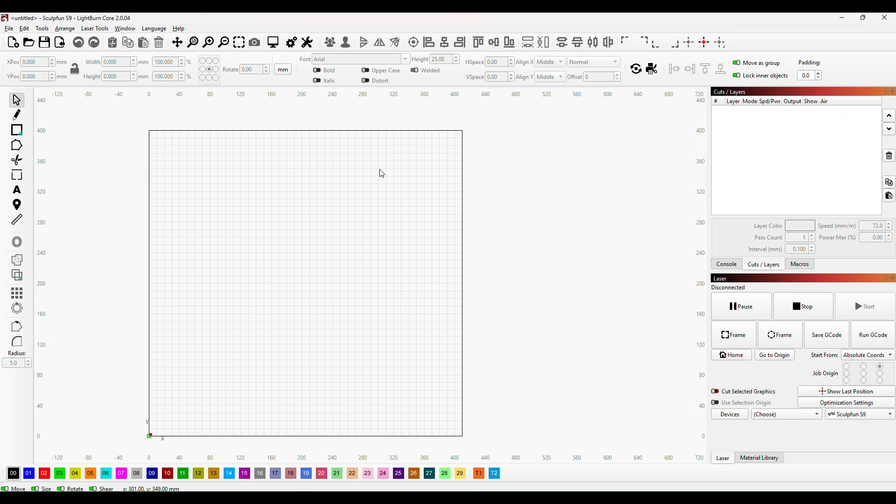So we open Lightburn, and the next thing we need to do is bring our plan into Lightburn. Now what I'm going to do is bring the whole plan in, put it over to one side here, and then work from that and bring shapes that we create into our workspace here, which will be the workspace for the Sculpfun S9, our laser cutter.

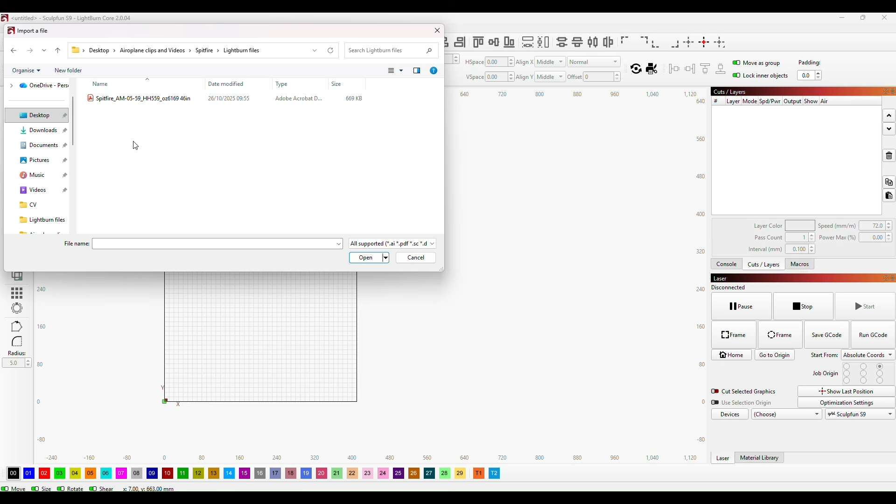So go to File, then import, and then we'll browse our computer till we find the file where we've got our plan, and click on the plan and import it in. So here we are with all of our files for all of our aircraft. So if we click on Spitfire, go into plan and Lightburn files, which is where we've stored it. It's a folder we made ourselves, and all I'm going to do is click on that.

Now it says the file we're trying to load is a multi-page document. Which page do we want to load? So we'll go with page 1, and there we have our Spitfire plan. Now you can see it's considerably bigger than our workspace. So what I'll do is move that up to here, because we can bring in page 2 as well, just in case we need to refer across at any time.

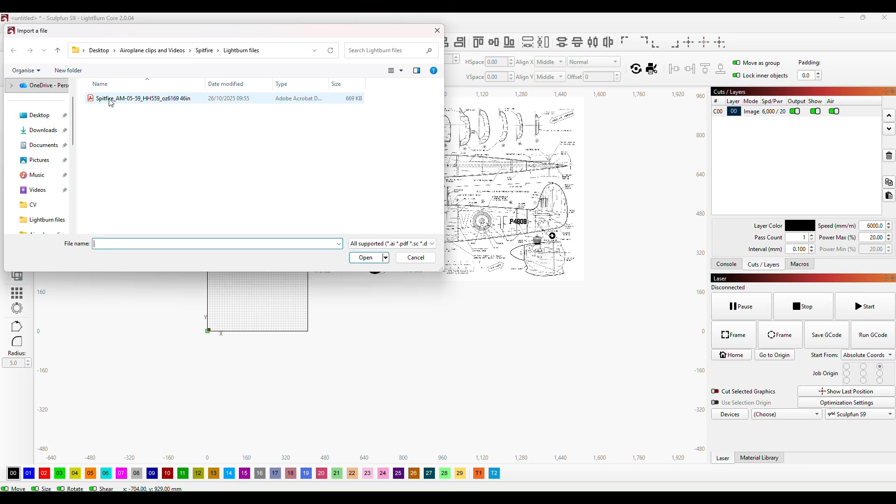While we're doing the fuselage, we might want to look at how the wing's going to shape and fit underneath, and when we're doing the wings we will perhaps want to look back at how the fuselage will look. So back again, we'll import again, so File, Import, and this time we will have page 2. And there it is. So we put page 2 just below page 1.

And we're going to work in any space that we want around here, but once we've got our components made up, then we'll move them into our workspace. Now this workspace is 410 by 400 millimeters, so you can see the scale of our plan here. So if we've got any large pieces that need cutting out, like the length of the fuselage, clearly we won't be able to cut them out in one piece.

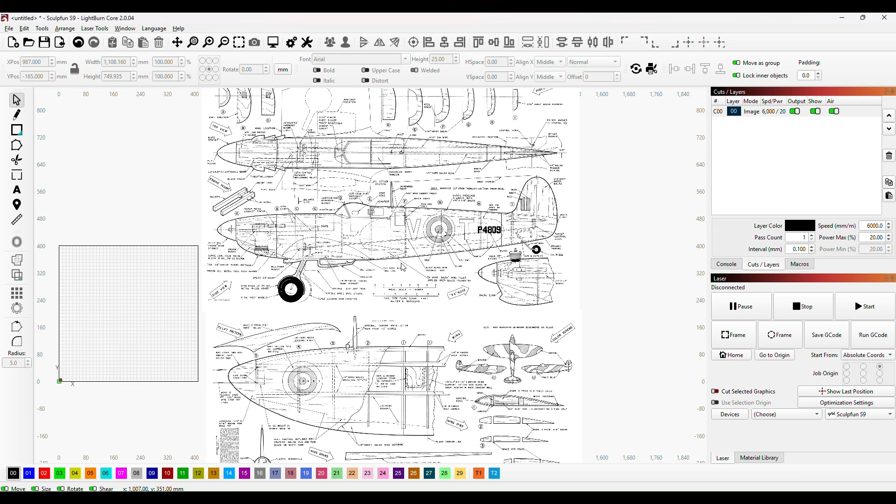We'll have to make adjustments and work that out when we come to it, but we'll go through all of that step by step. Okay, one of the first things that we need to look at on this plan is the fuselage itself. This fuselage is built around a keel, and if we scroll right in, you can see this dotted line just inside that goes all the way around. That is the keel, and if you look up here, you can see it's in dotted lines along the plan view.

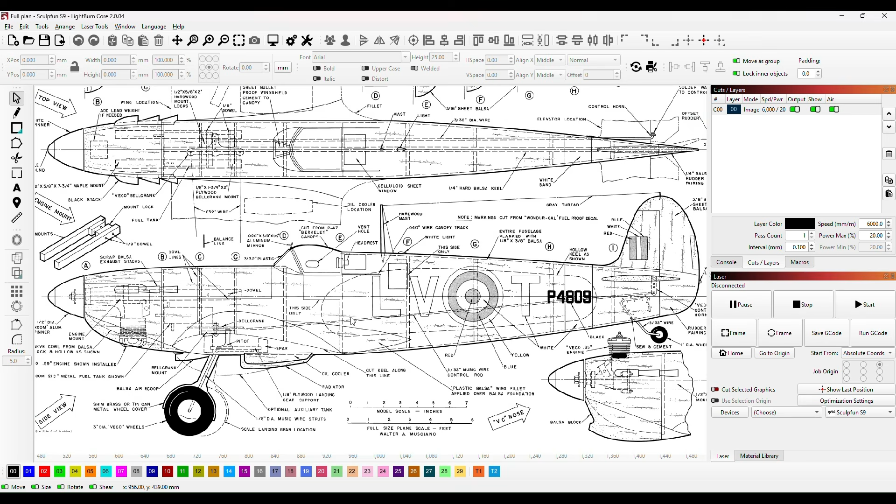What the keel is, it's a big center sheet that has the full profile of the aircraft or the fuselage, and then either side of that keel you've got these formers which go down the length. You can see they're all marked going down the length of the fuselage to give it its three-dimensional shape. So what we want to look at first is producing a flat keel or a flat outline shape of this fuselage. Now if you look just here, it says hollow keel as shown. In other words, it's not just a flat sheet of balsa, it's actually hollowed out there.

Now what we'll be doing is taking this a little further. I'll be making an outline of the keel so that we can then put these formers on the outside. So what I'll be doing is making a series of pieces that will fit on our workspace, that will join together and form this center part of the aircraft. Okay, so that's the first thing we'll get on with.

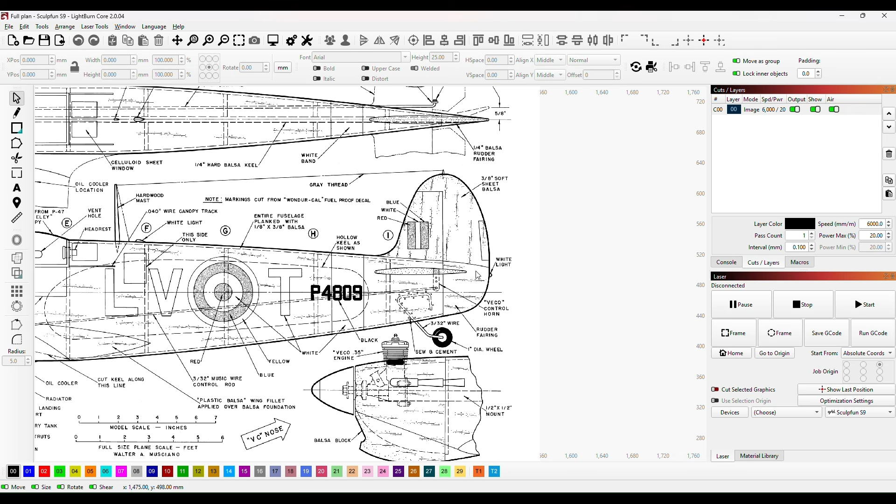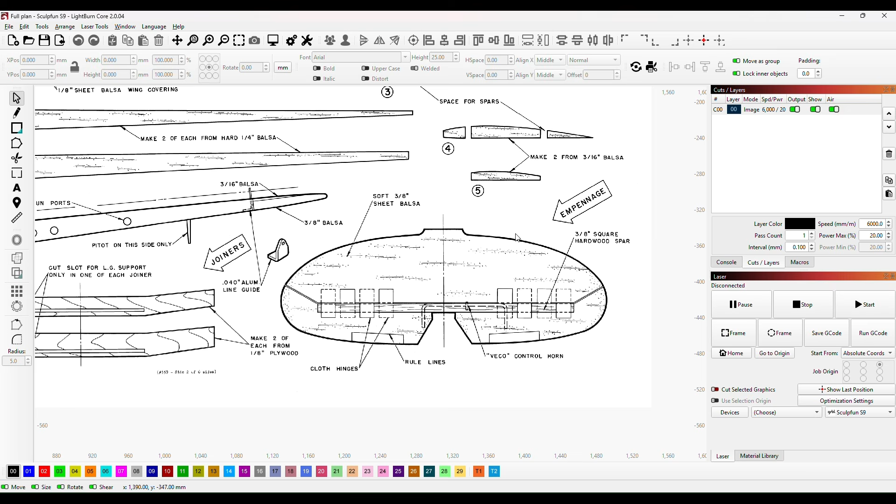Now if you just have a look here, you can see the tail plane or the horizontal stabilizer is just a solid piece of balsa, and it slots into this keel. So if we just come down to our second sheet here, this is the tail plane. What we'll do with this is cut this part out of a single piece, and I'll leave the center section flat, and we'll sand down the outside of that center section so that we get the profile of the tail plane.

So by doing that, when we come to produce this keel here, all we need to do is produce a flat slot in there rather than this profiled slot, and that will allow us to just push the tail plane in, and it'll fit really nicely. Okay, so let's get on with doing that then.

So to make this keel, all I'm going to do is trace this outline all the way round, drop in here, and then all the way around the outside down to this point, and then back under, and then up here, because the keel, as you can see, finishes just there. So then the rest from that point forward will be where our motor sits.

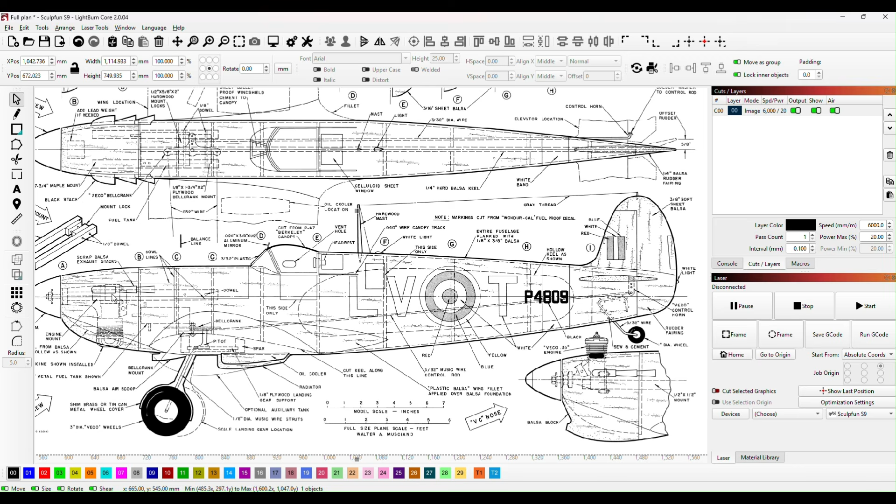Now having said that, I think we would be better off extending the keel forward to the point where our electric motor will sit, because obviously this is designed to fit an old internal combustion engine, one of the glow motors, or perhaps a diesel, and so our motor will be much shorter. So I'm going to bring the keel further down so that our motor will sit here and the propeller will still be in the right place, the spinner will still be in the right place. Okay, so with that said, let's trace this outline and I'll show you how I'm going to do that.

Now our motor is 30mm long, so what I'm going to do is just measure 30mm from there, and I'm going to just mark that off. Now I'll show you how I'll do that. All I'm going to do is create a rectangle, and we'll do that in a different colour. I think we'll do that in blue so that it stands out. And then if I make the width of that 30mm, just like that,

I can now bring that down, and if I just line that up with the end of the aircraft there, I know that now this bulkhead here, I need another one just here. So I'm going to make my keel that size, and then I'm going to produce an additional bulkhead here to mount the motor on.

Okay, so if I use the line tool, and I'm going to use a different colour again so that it stands out against what we're doing, all I need to do then is start to follow around the outside of the shape of the aircraft. Now you'll notice I'm not following the dotted line, which is the normal keel. I'm following the outer line, and there's a reason for this.

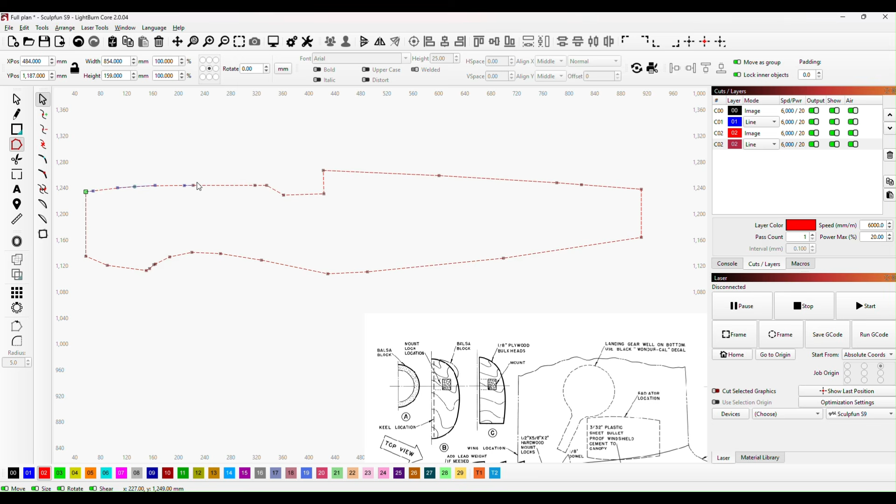So what I'm going to do with that is just bring that shape over to one side. I'm just going to bring that to there, and that's going to be our outline. So if I just zoom in on that, I'm going to convert that to nodes, and then each of these nodes in the center, I'm going to hover over those and convert that to a smooth curve node just by pressing S, and what that will do is blend our shapes in.

That just needs to go up slightly, so got to make sure that these remain smooth, and there may be some adjustment to be done. So just select that node, press Control, and then the Shift arrow keys to just blend that slightly. There we go.

Okay, next we'll come to this one, hover over that and press S, and then this one, press S, and you can see the difference between a corner node and a smooth curve node. The corner nodes are square, you can see this one is square, and the smooth curve nodes are round. So that's the difference. Now these here I'm leaving as corner nodes because I want that to be absolutely flat and straight, as I want this to be flat and straight. So I'll come to this one and convert that to a smooth curve node. And the same with this one, and then the same with each of these.

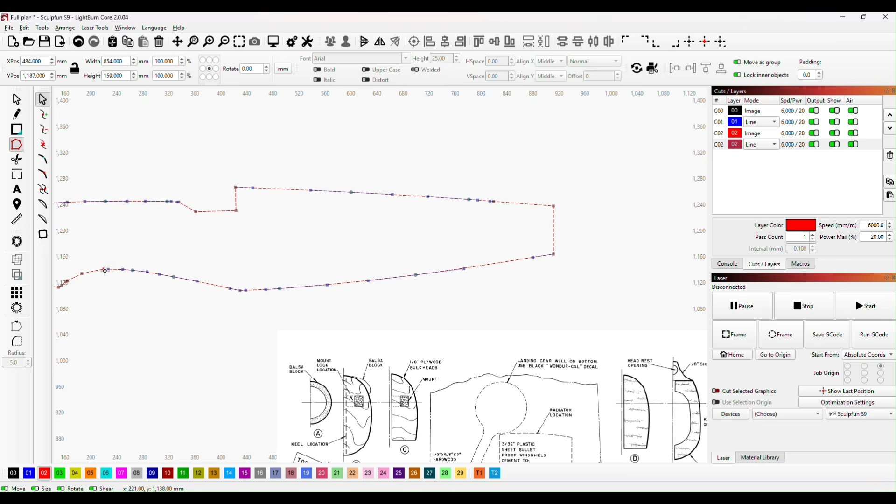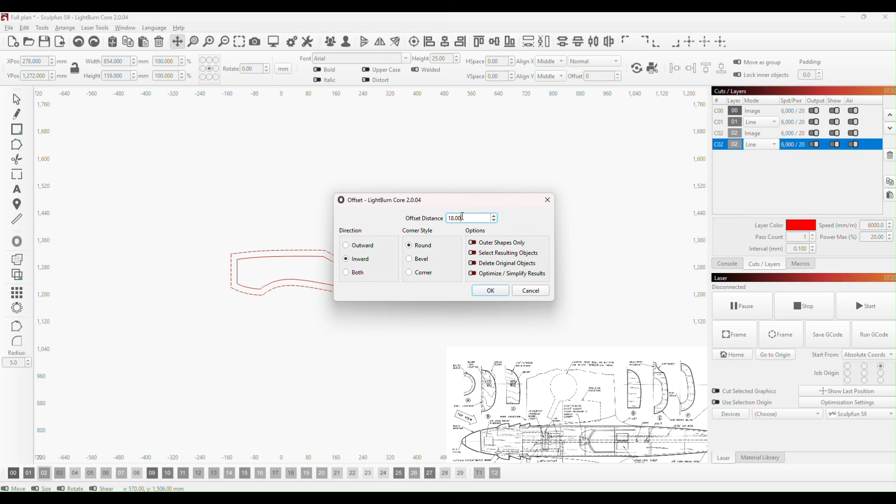And this one here, and there we go. So I think that when we come off that now, we'll find that we have got a nice profile of the Spitfire. Now if I use the offset shape tool, and I click on that and I come inwards, I would say probably maybe 18 millimeters. So 18 millimeters.

What that gives us is an 18 millimeter shape all the way round, and this is going to be cut out of 8 millimeter balsa, so it's going to be nice and thick and sturdy, and that will give us our outer shape for our aircraft. The reason I've hollowed this out is because we're going to have our electronics inside the aircraft. Okay, so all we need to do with this is cut it into shapes that will fit into our workspace, and we'll be able to then lay that out and cut out the keel.

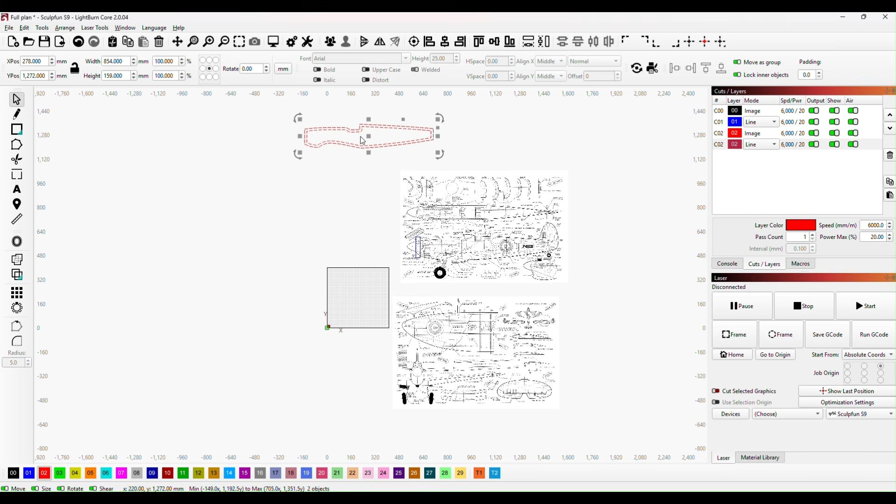So to cut the outline that we've created into small sections, we will use our line tool, and, making sure that we cross the line completely, we will just put our lines down like that, and then we make a copy of the whole thing, just like that, press Control C, Control V.

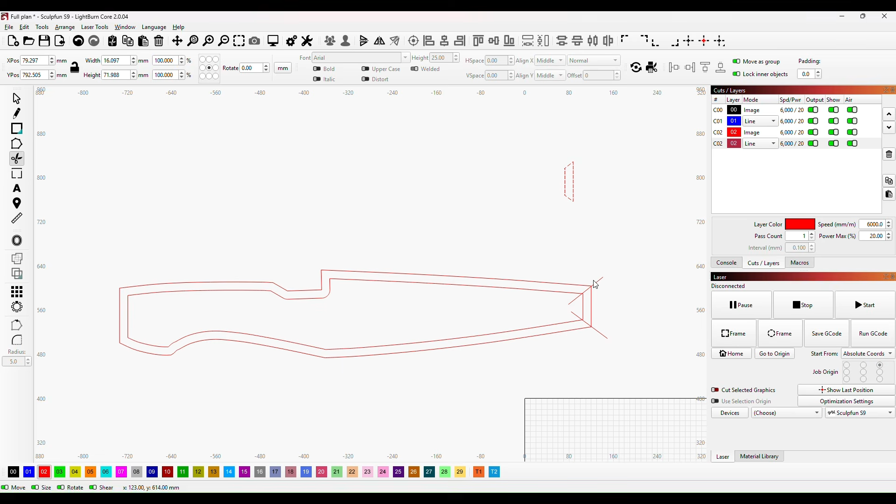What we've got now is a copy, and if we go to our snipping tool, all we need to do is snip away the bits that we don't want, and we're now left with our end piece, which will be just like that.

And what we can do is we can now label this up. Go to our label, and we'll reduce the size of this, I think, to 5 millimeters, and we'll just write that in as, in fact we'll go down to 4 millimeters, I think, and we'll just label this as keel K1, or K1, keel 1, and that will be our first component of the keel.

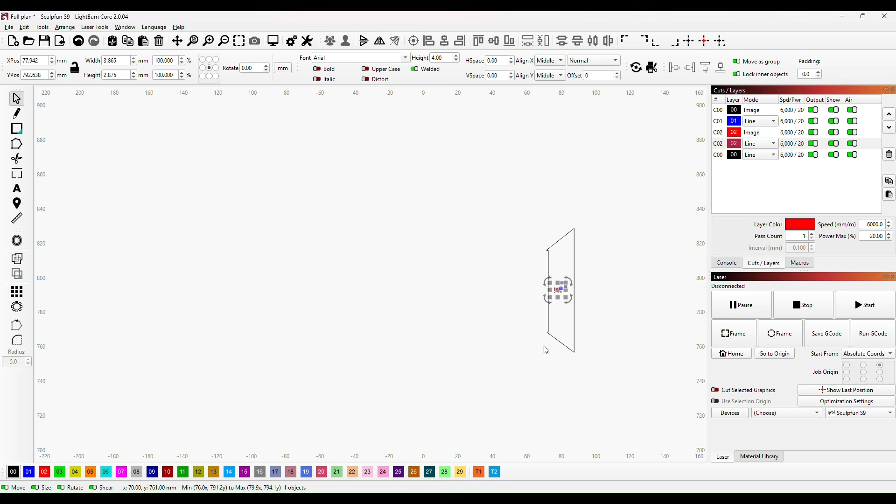So what I'll do very quickly is I'll change the outside of that to a cutting layer, and I'll change the text to our engraving layer, which is going to be the blue layer later, and I can bring that onto our workspace just down here, and then just lie that flat.

And what we'll do is we'll put that down here somewhere. Whoops. If you do find that you do something like that, what I've done here is I've dragged the shape without taking the letter in. If you press Ctrl Z, you'll go back to where you were. So what I need to do with this is just group that shape. So that's now a completed part of our keel.

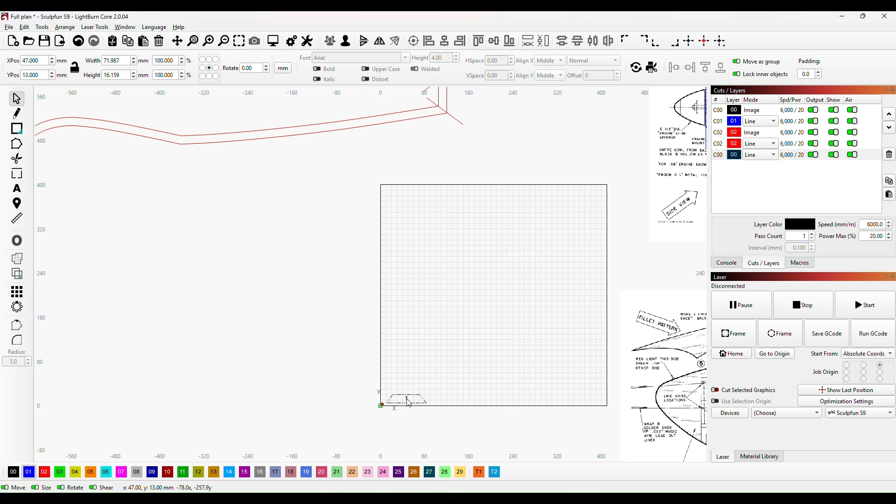If I want to get this flat and horizontal, say if it was at a slight angle, all I need to do is go to nodes, hover over one of the edges and press A, and that will align it. So that's now aligned to the horizontal, and I can now put that onto our workspace wherever I want to, and I'll arrange everything else the same.

Now the next thing I want to do, and I'll be doing this to all of the shapes that we make, is I want to put in some tabs so that when I cut it out on the laser it doesn't fall apart. And all I'll do, put a little tab there and a little tab there.

Now, in case you're wondering what those tabs do, they will leave a 0.5 millimeter gap in the laser cut, and if we go to preview you'll be able to see that. So if we scroll in, you can see there's a little gap now, and there's a little gap there, just there and there, and so that will mean that when we pick up our sheet of balsa later, when all of our components are cut out, everything doesn't fall out.

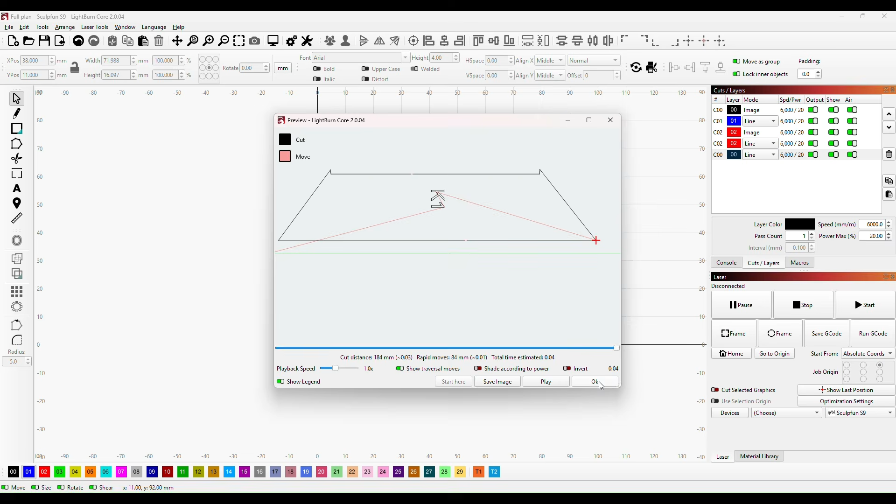Okay, so what I'm going to do now is exactly the same process with each of these all the way around the shape, but before I do that, let's just have a look at what we can actually fit onto our workspace. So we're going to have to cut the top section as well as the bottom sections, etc.

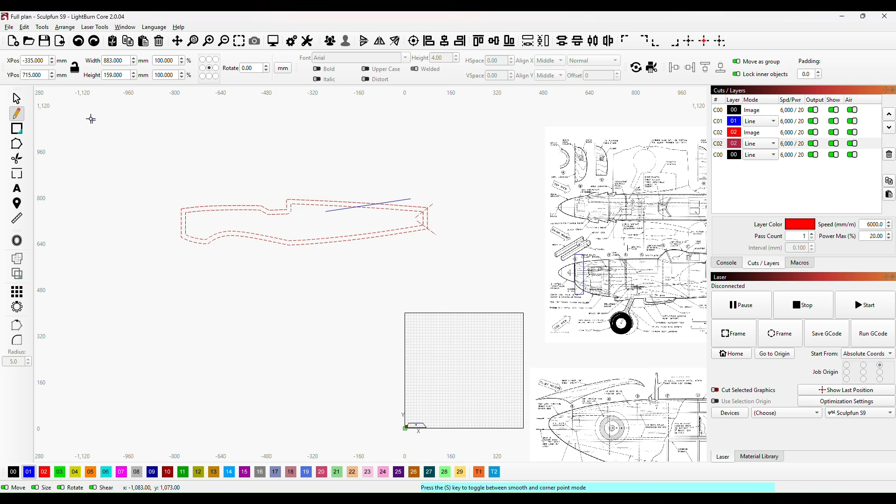So if we go to our line tool, now what I want to do this time is I want to make the line quite long, and at a very shallow angle, so that we get a nice long length of the component to stick together. So I think that should do that. Okay, move that along a little bit. And we'll call this one K2, and then K3, K4, and we'll just keep going around creating this shape.

So I'll just make another copy. And then all I'm going to do is use my snipping tool to remove everything I don't want from there. And I'm left with K2. So if I do the same process, if I just level this up, go to nodes, click on there, hover over this one, press A, and that's leveled us up. Come off nodes.

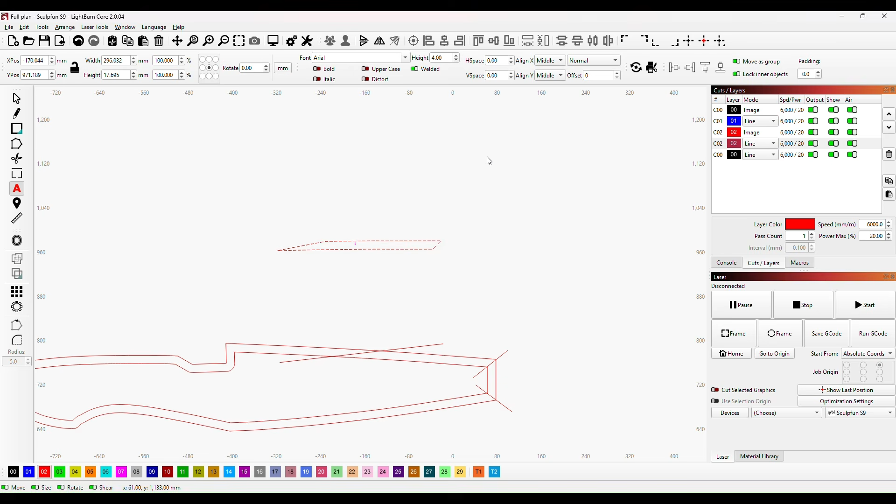And we will call that K2, keel 2. Make the outside our cutting layer, the text our engraving layer. We'll group, and we'll put our tabs in. And that's our component completed, and that's K2.

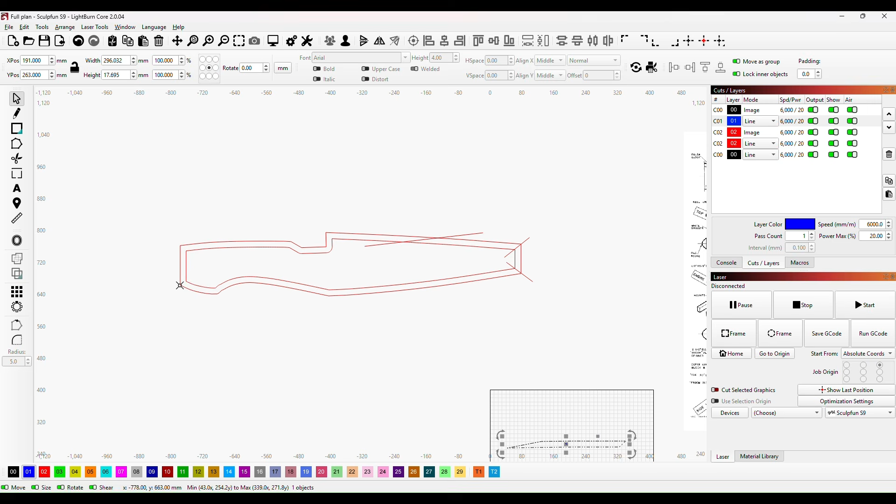What I'll do now is I will very quickly go around the shape, and every time there's a change in direction like this, that will be a separate component. So I'll make a component there which will join with a component here and there, and then I'll make this into the largest components I can, make the end, and I'll show you what that looks like in just a minute. Okay, so this is the completed shape here with all the cutting lines on, and these are all the components that I've made up, which when fastened together will create the keel.

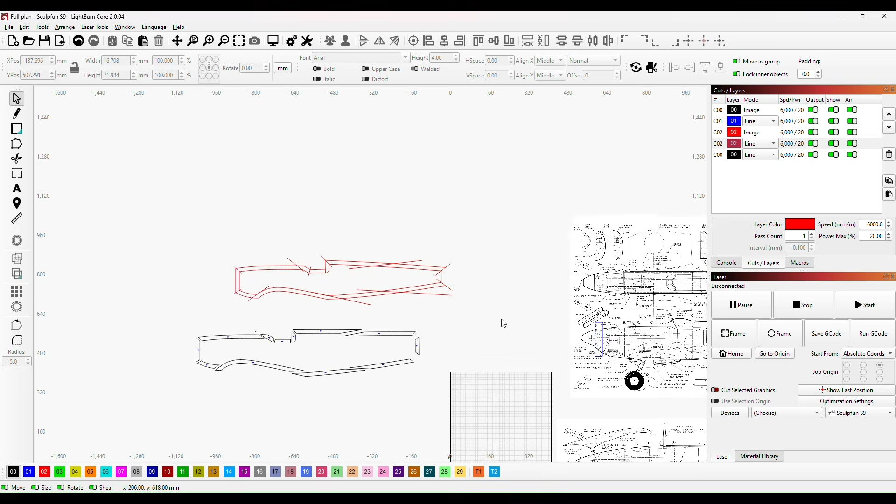I've brought the nose forward, as you remember, so our bulkhead we will make where we've got these sections here. We will have another bulkhead just here on this blue line, which we'll make up, and in that I will put the holes to mount the motor, and I'll show you what that looks like when we come to put it together.

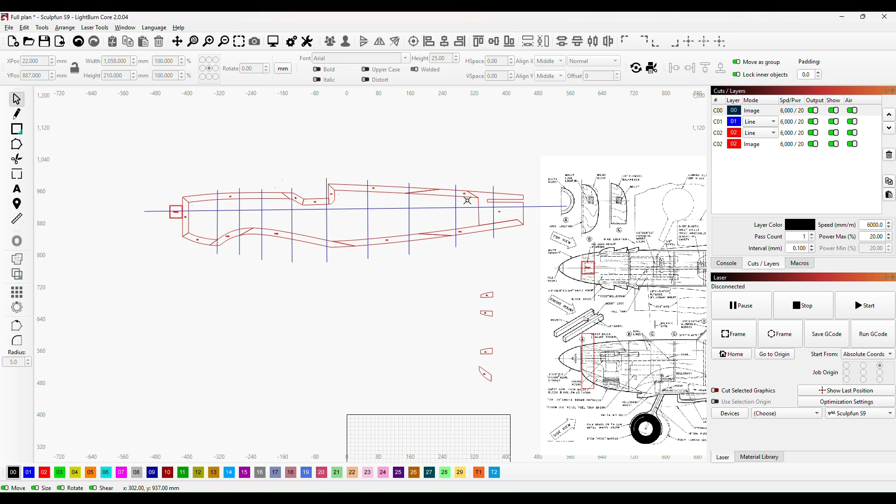Okay, so what I've got here now is I've got all of the components on this shape here, all represented, but I've made a change to the back. Remember we spoke about the rear or the tail plane that has to slot in at the back. So where we had the small shape here, I've gone into nodes and brought it down from the top, I've made it into a larger shape, and then I've cut in a slot here, 7mm wide slot, because that's the material that I'm going to use.

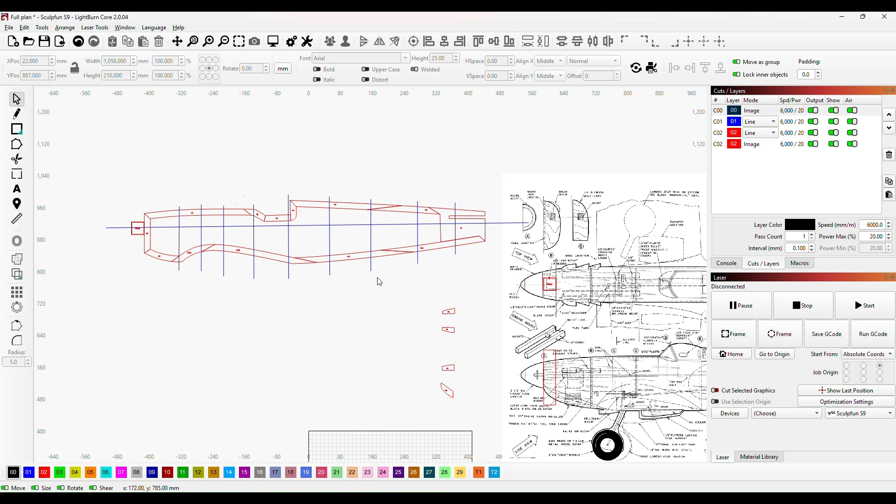And the way I did that was I just made a rectangle. When this was a solid piece, I made a rectangle that was 7mm high, and I overlapped that to where the wing would be, and then I used the snipping tool to cut that slot out. Now what I'm going to do is overlay this onto the aircraft itself, or onto the plan itself, and I'll then talk through what I've done here.

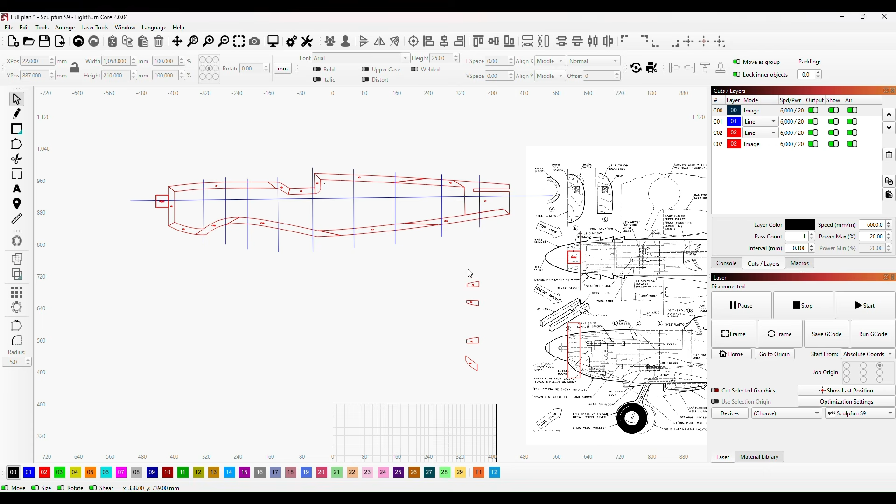Each of these blue lines is one of these formers up here. So each of these formers is represented on the plan, and I've put a blue line where those formers are, so that when I come to make the formers, I'll be able to line them up on this plan and put them in exactly the right place so that I can do any fine adjustments. But I'll show you how I'm going to go about that later. Let me just put this back onto the plan.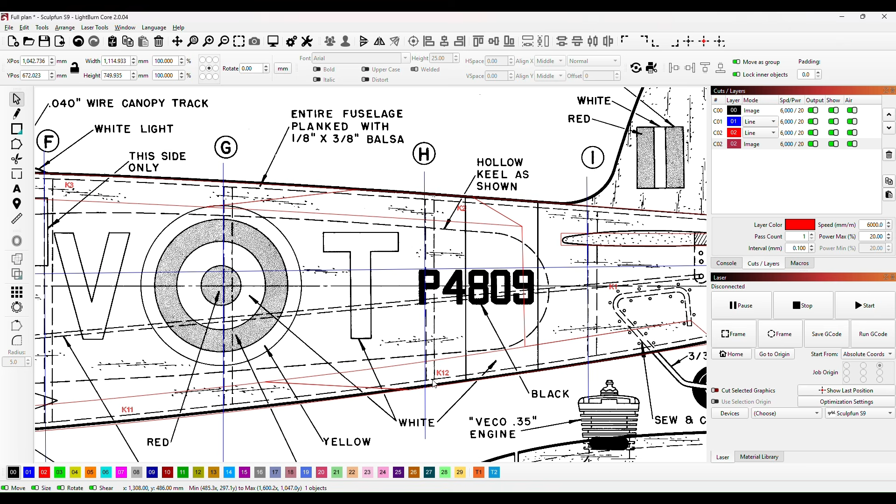Okay, so what you can see now is, if we just scroll in here, the slot in the tail end is exactly where the tail plane will be, and each of these blue lines, you can see one there, and that's just below where former H will be. There's another one here which is where former I will be, and I've put these blue lines on the front edge of each of these formers, so you can see the former would sit there, and the blue line is at the front edge of that.

Okay, so what this means now is that I can start to make these formers, and I've got a plan here which will be over to one side, which will help me with shaping them up, and I'll show you how I do that in just a minute.

Now these little shapes here, what I've got is nose side, so N and a small s, NS, and this is nose on the other side. So if we come up to here, they are going to be what sits either side of the motor and gives us the space for the very front of our fuselage, where the motor will protrude out and the spinner will sit. So I'll just move those over there.

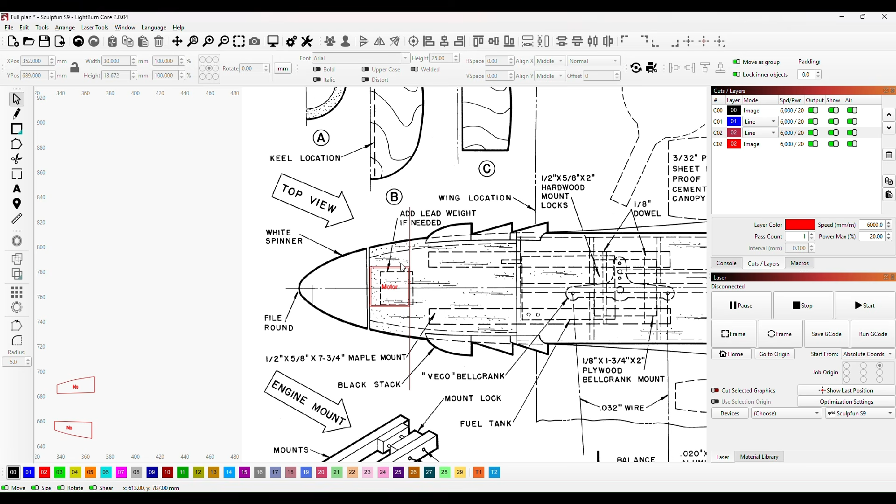I just wanted to show you those before I move them away, and I did those in exactly the same way as I did the outline. I just went to a line and then drew round, I put a node in the middle, made that into a smooth curve node, and that's how we did that. So with all that said, I'm going to now move this out, and use that as a plan when we start to make up these components. And we'll start with component B, just here.

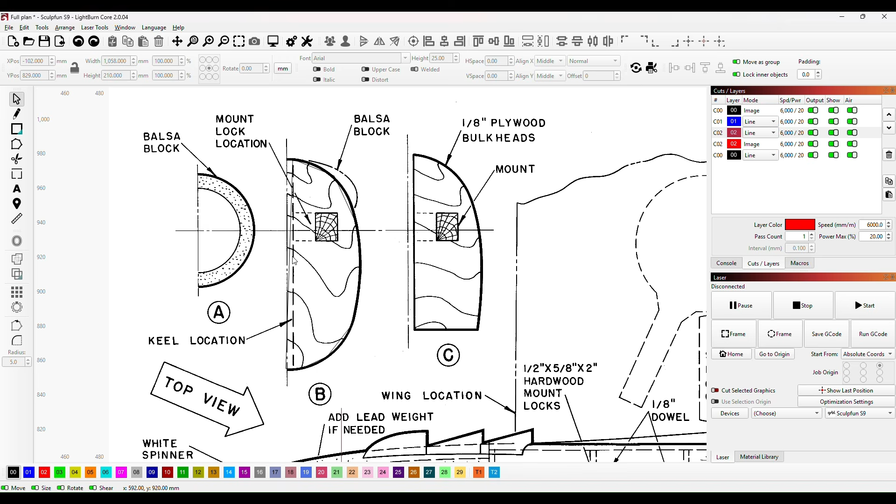And all we're going to do is produce this with our line tool. Now our keel will be in there, so we've got to allow for that. And the way I'm going to do this is I'm going to just come round like this, oops, I'll correct that in just 1 second. Now if I just convert this to a different colour, what we'll be able to do is go to nodes, and I'll be able to bring those nodes in.

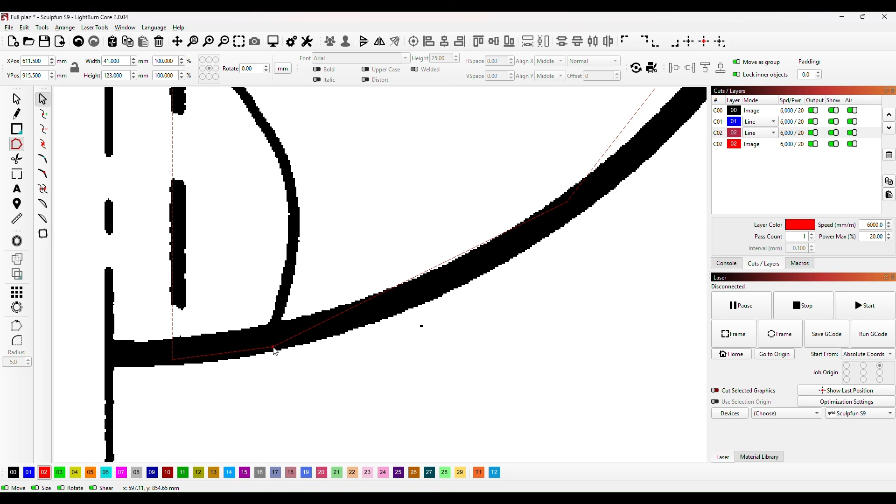Now I'm going to go to the outside of this line, but I need to bring that in to there because that is where the keel will be sitting, and I'll go to the inside of that keel, which would be the outside of this shape, so to speak. Select this node, we can bring that to the outside, and then select this node, bring that to the outside, and just follow that process round.

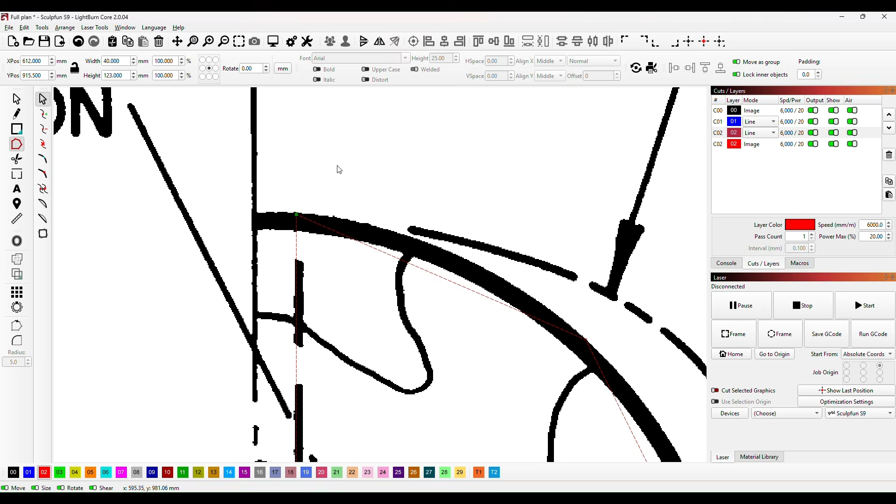Just follow the process round until all of the nodes are on the outside of the line, and this node here will just join those together, snap those together just like that. Okay, so what we've got now is we've now got former B made. Now there's a couple of things to note here.

One is these formers are designed to have planking all around the outside, which we're not going to do, so we may just have to alter the size of these formers once we've fully created them. So all I'm going to do now is change each of these into a smooth curve node by hovering over it, press S, and then when we come off there, you can see that that is now a perfect shape.

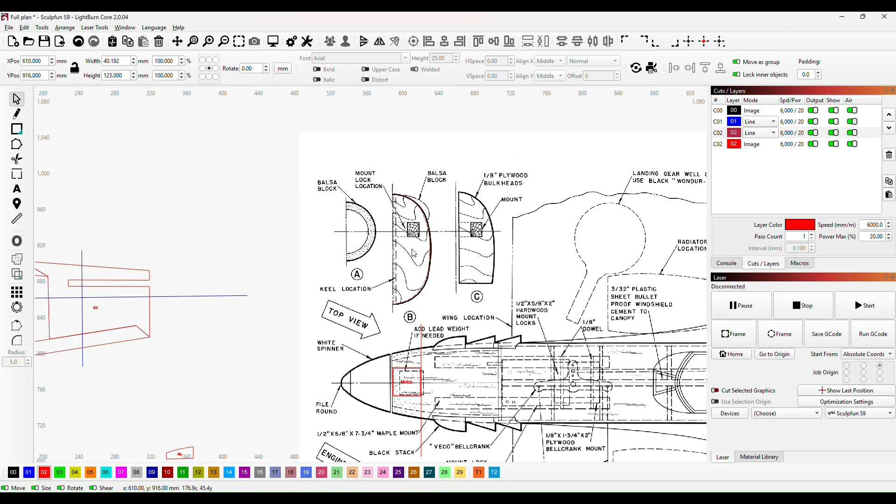If we just go back to nodes and just have a little look at this, there we go. Just straighten up that corner node at the top there, and if we come back there and then we bring that over, you'll see that that is now a perfect copy, or more or less. So if we just bring this down and we put it over our plan, what you'll find is that it more or less sits on the inside of where the planks are going to be. So we need it to be a little bit bigger than that.

Now the planks were going to be 1/8 balsa, which is 3.2 millimeters. So if we increase the height here by 6 millimeters, so 123 millimeters there. So if we take that to 129 millimeters, what you'll find is we're now at the correct size for our plan.

Now the other thing is the width as well is going to change, but that's only going to change by 3mm, because obviously there's another side to this. We'll need to make 2 of these, so that needs to be 3mm wider than it is. So if I just change that one number there to 43.192, that will now be the correct size for our former.

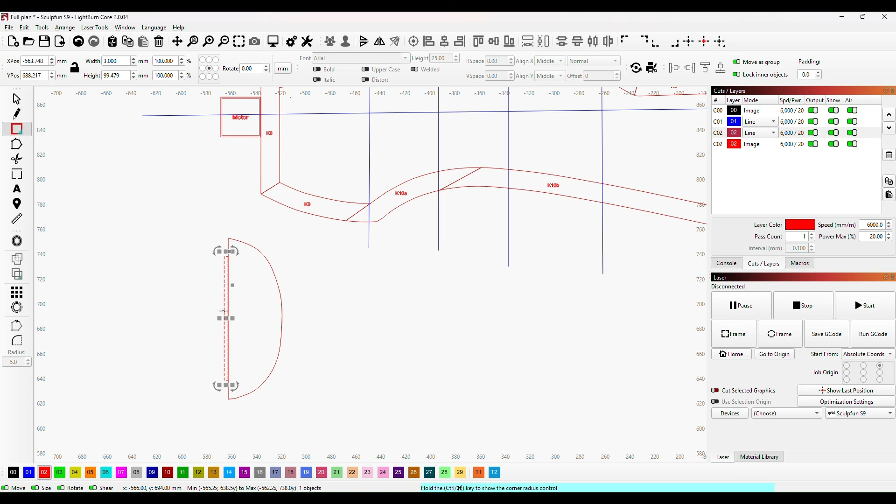and then what I can do is make sure that by pressing Shift and Control and then the right arrow key, I can just bring that over until it's just touching our component. And then if I stretch that so that it comes inside, so I haven't moved this outer edge at all, I've just stretched it to come inside, I can now use the snipping tool to take away the bits that we don't want, just like that. So our former will now sit inside our keel, and it'll just press into place, and that will make a really good strong connection there.

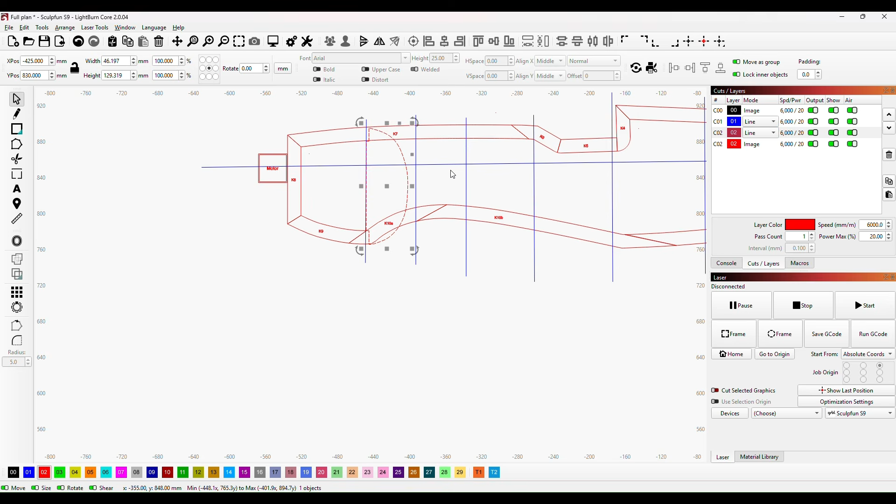Okay, now the next thing I want to do is along the side of our fuselage, the full length of the fuselage, I want to run a longeron straight down there. Now all that will be is 1/8 by 1/8 balsa, so it's just going to be a piece of square section balsa that runs the length of the aircraft.

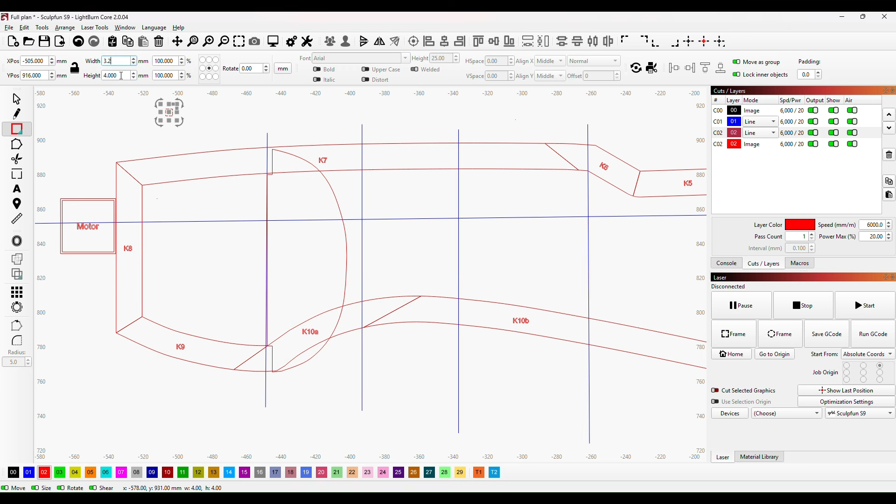So what I need to do is along this center line that I've drawn, I'm going to put a square cut right in there, and the way I'm going to do that is just make a small square, and that's going to be 3.2 by 3.2, and then what I'm going to do is bring that down and I'm going to get it right on the centre and then rotate it so that it's at the correct angle.

Just like that. Just move that into place, and now if I just stretch that a tiny bit, I don't want to distort it, and then if we get our snipping tool we can just snip away these parts, and we've now got the first of our grooves for our longerons and our stringers.

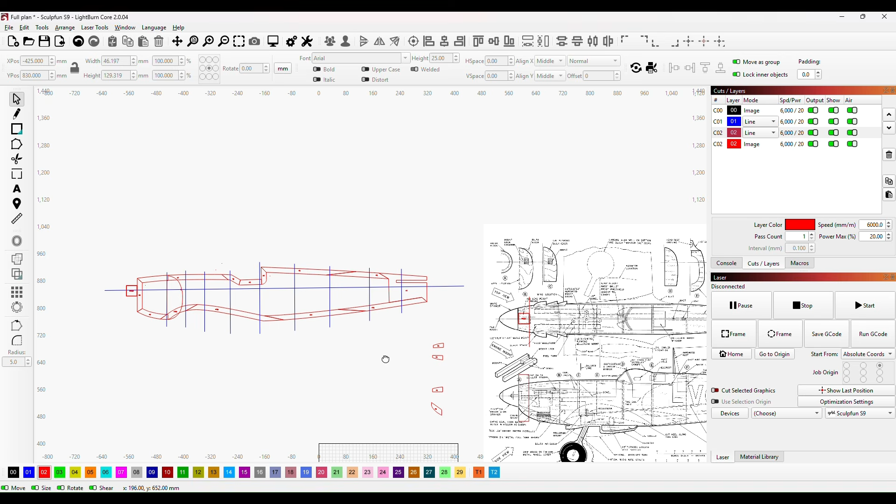Okay, so what we will do later on is I'll put a couple more of these lines along, and I'll add in additional slots for further stringers to go in later. But what I want to do now is just make the next component up so that you get the idea of how we're going to do that. So we'll make up component C. Now this, you can see this has got a flat bottom because it's going to sit on the wing.

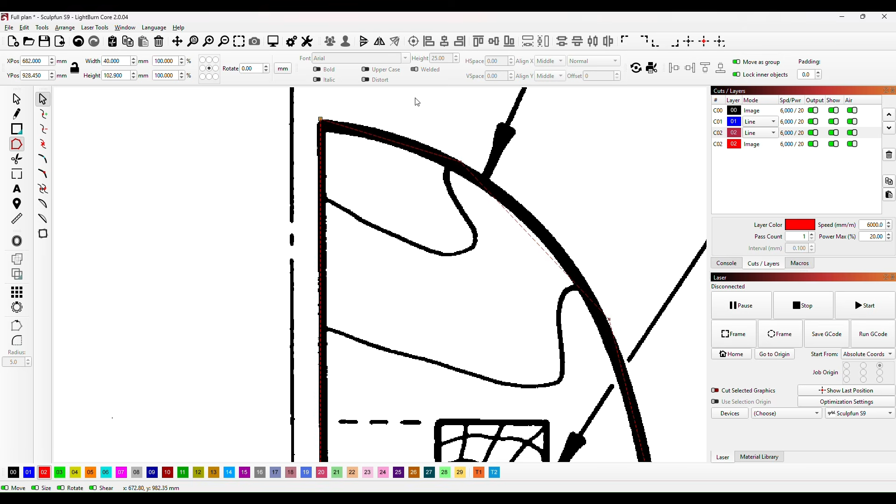So if we go to our line tool, and all I want to do is just the same as before. So let's just move all of these into place again. I'll join that one up to there, and then just to bring that in more precisely, I'll press Control and Shift and my down arrow. I'll just select that. I'll bring it down to the edge there. That one there is on the outer edge, which is good. This one here just needs to come across a bit. So again, Control and Shift, a couple of clicks, and in we come.

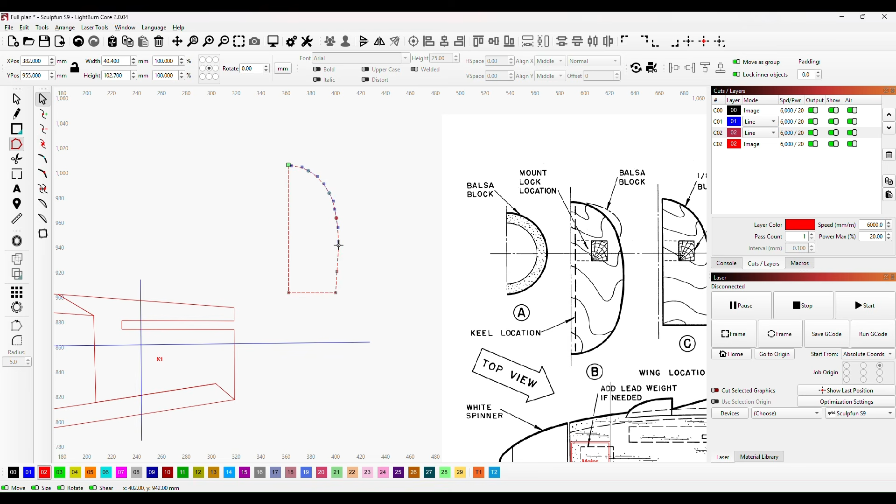Come straight across here. And we can then go to nodes and do exactly the same thing, change all of these to smooth curve nodes by hover over, press S, and then when we come off there, we have a look. Seems to be a little bit of a wobble here. It looks like we've come inside a bit. We go back to nodes and we'll correct that. There, that looks much better.

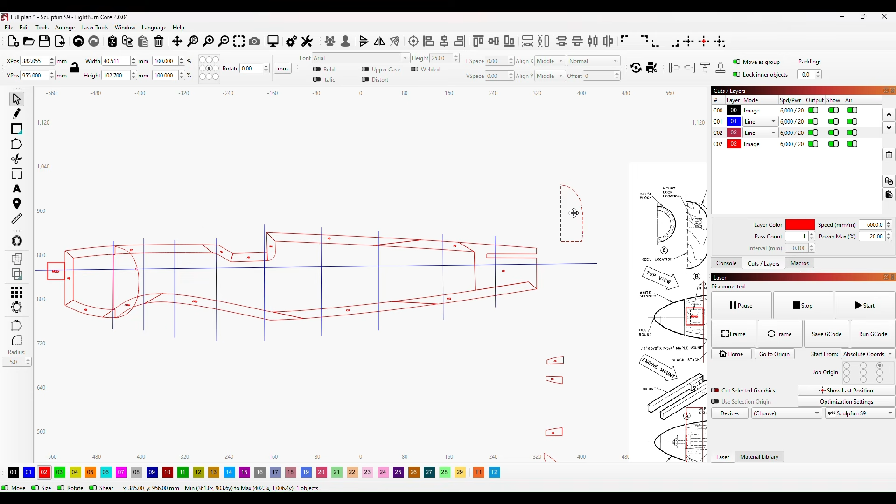Okay, so once again, we are going to be a little undersized, but it won't be 6mm this time, because on that bottom edge there's no planking, but we've got the wing sitting here. So this, right on this line here, has to come down to the bottom of this shape here. We want that corner there to sit on the wing, which will be sat underneath. So there we go. That will be absolutely perfect right there.

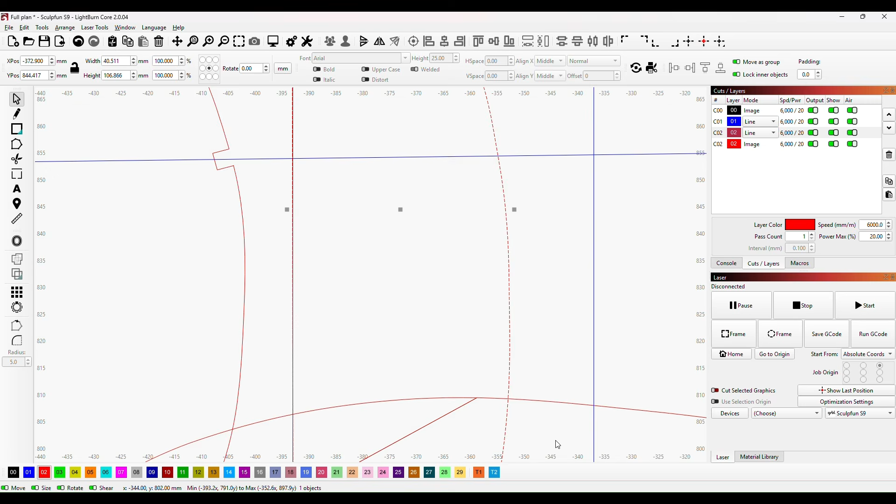Now the width we need to increase again by 3mm, just like we did before. So the width, we can just alter that number there to 3, and there we are. Okay, we'll bring our 3.2mm square across. In fact, we may as well make a few copies of these, I think. Because we're going to need one at each of these points. There we go. And we will be adding more later as well.

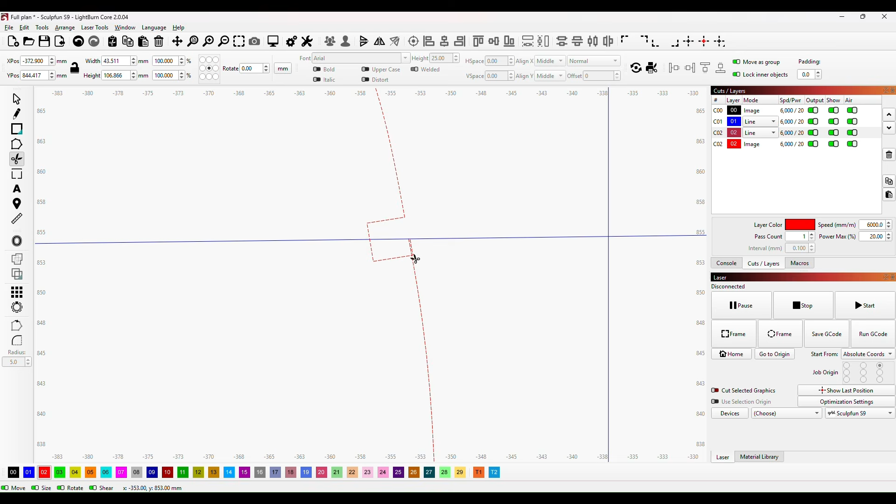So okay, at the centre, right on that line there, now all we need to do is just ease that across without distorting it too much, and then get our snipping tool and just snip these bits out. And we've now got our next former. What I'm going to do now is I'll carry on with the rest of the formers and I'll show you what they all look like when they're completed.

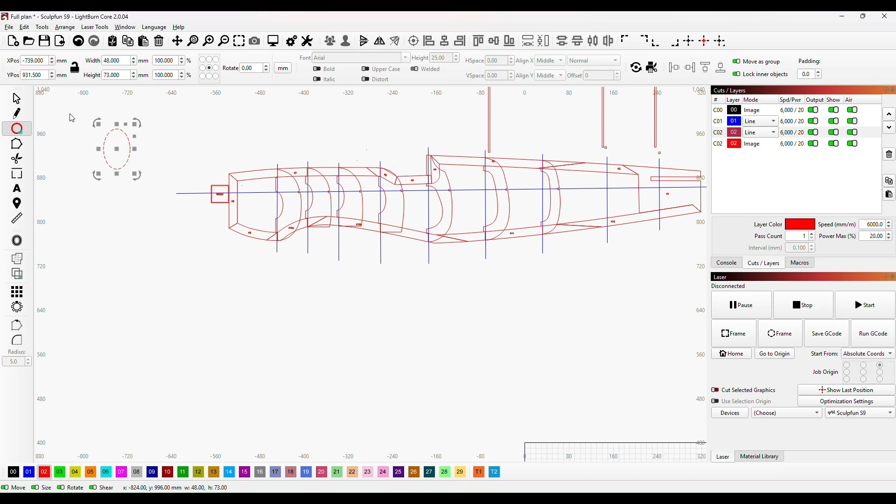Okay, so most of these formers are done now. With these front formers, which were originally solid, I'll just show you that. There, see, they're solid. They'll join each other in the centre. What I've done with those is I got an ellipse, and all I did was overlapped the former, and then I snipped it away so that when the two formers come together either side, we'll end up with a hole for any cables or battery lines to go through, so we can connect up our motor. So I'll just delete that.

Now all the formers are nearly done. I've just got the last one to do, and because these are a different shape, I'll just show you how I do this one. Very simple. Go to lines, and then very quickly just go around the outside. Don't need to be too accurate just now, because we're going to go to nodes and we're going to fine tune this. So we just need to get enough points all around the outside of the shape, and then we'll be able to work with that. So come back to this start point, and there we go.

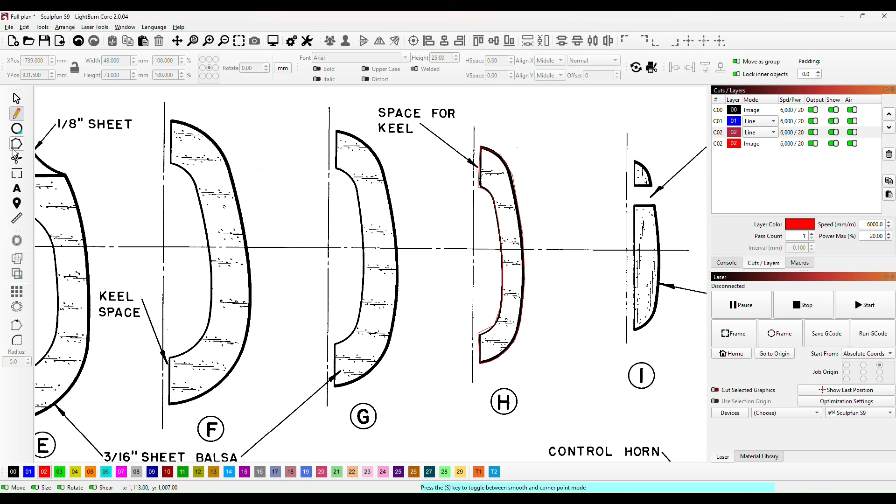So we then go to nodes, and then all we're going to do is select our shape, and then if we just highlight that node and then Control and Shift, we can just move that in until it's exactly in the right place. We want it on the outside of the line, and then we highlight that one and do exactly the same. Whoops. So highlight the next one and then bring it in until it is just on that line.

And we just keep going round the shape. And it's the outside shape that's most crucial, because that will be forming the shape of our fuselage. But we want to do the same with the inside of this shape as well. That one looks about the right place to me. Just very quickly.

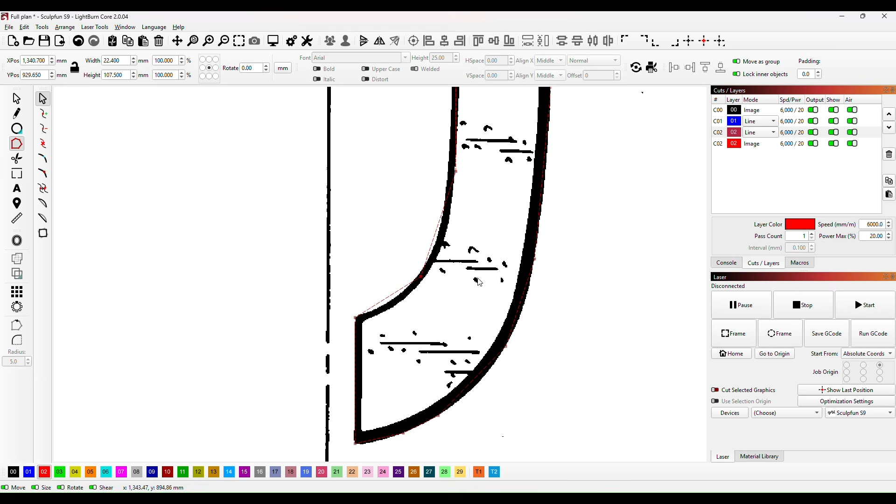Okay, and this corner, bring that out to where it's supposed to be. And this one here, miles out. Very simple, bring it back into place. And you can see, even if you can't see the node against the background, what you can see is the change of direction of the line. So all you need to do is grab the shape, grab that area, whoops, and you'll be able to grab the node that way.

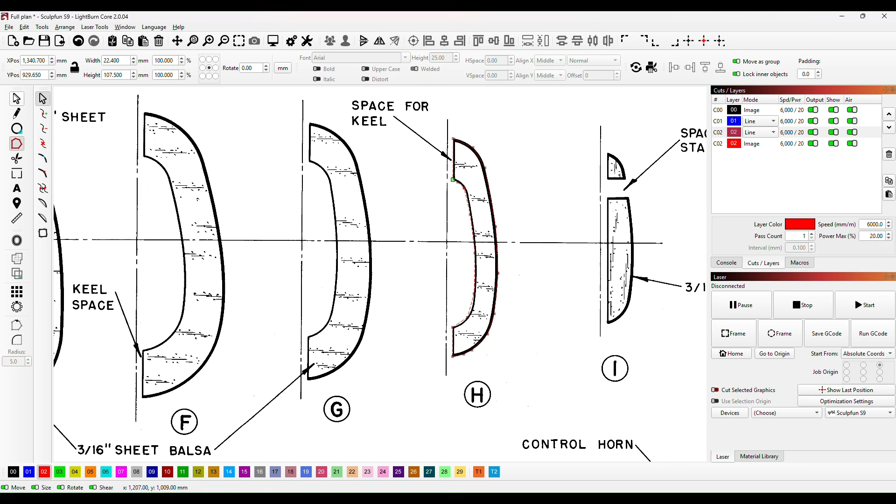Okay, so that's all the nodes moved onto the outside of the line. So if we then just grab that shape and drag it out to where we want it, and then go back to nodes, all we're going to do is hover over each one and press S, turn it into a smooth curve node. And then what you find when we've done this is we'll have this really nice shape. Got one that's a little bit out there, so if we just move that node, there you go, and that makes it a much nicer shape. So if we come off that, you can see how that's now formed into a shape.

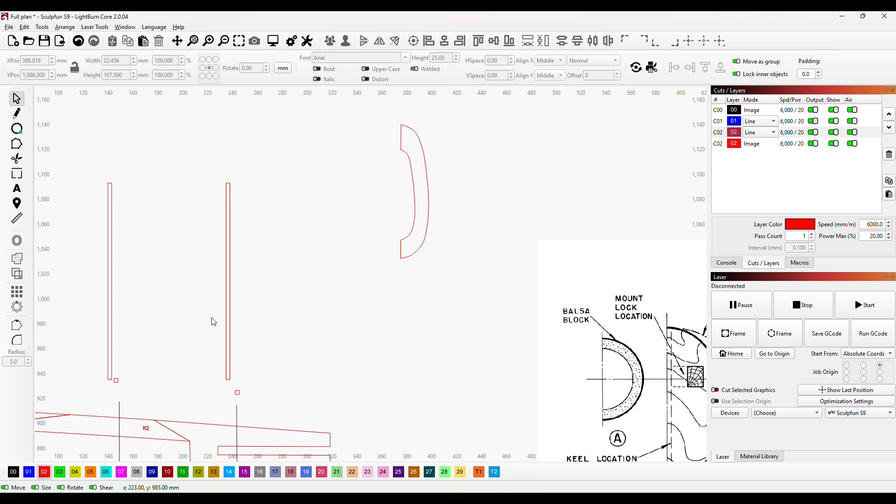Now these rectangles here, because they were made as a rectangle, what we do know about them is that they are absolutely vertical and they're also absolutely straight. So if we then bring this across and just line it up on this shape, what we can do is just grab our shape and snap it into place on that line. And then if we go to nodes, we can just make sure that these nodes are exactly in the right place.

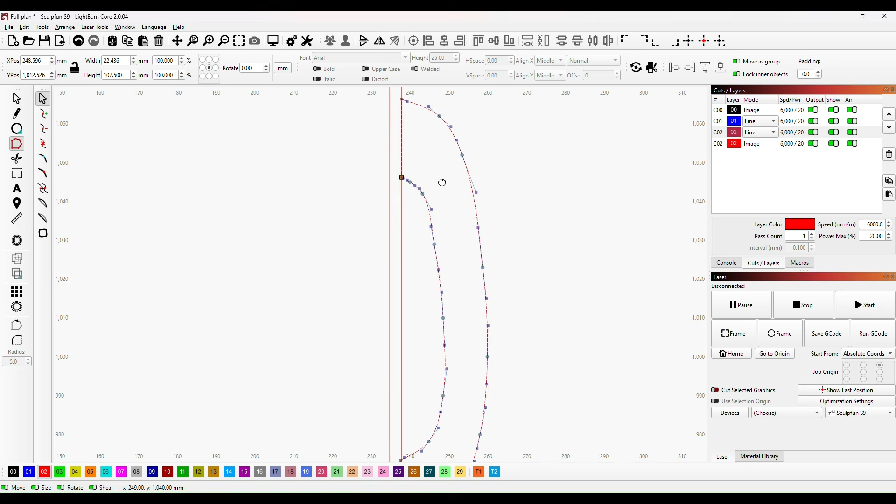There we go. These down here, I'm just going to move these over slightly, and the reason I'm doing this is because when we lay it on our keel, we now know that that is going to be absolutely perfectly flat and it will sit nicely on that keel. So if I bring that down, line it up on its space, and you can move the whole shape now. Because we've selected that shape, if we control and shift, you can move that whole shape 1/10 of a millimetre at a time. So we line it up on our blue line.

Now bear in mind that we still have to expand the height of this by 6 millimetres. The 3 millimetres for the planking that would have been on the outside of the plane at the top, 3 millimetres for the planking that would have been on the outside at the bottom. So our height is 107.5. If we add 6 onto that, this needs to go to 113.5. And then when we fit that in, we'll see that we're very, very close to being exactly the right size. Maybe take a little bit off the bottom there, 0.5 millimetre maybe.

Okay, and then of course the width needs to be expanded by 3 millimetres, so that becomes 25.436. And now we know that we've got our proper size for the model that we're making here. Okay, and now the next thing to do is we're going to make that little key just here, just like this one, so that it sits in between our two pieces of keel.

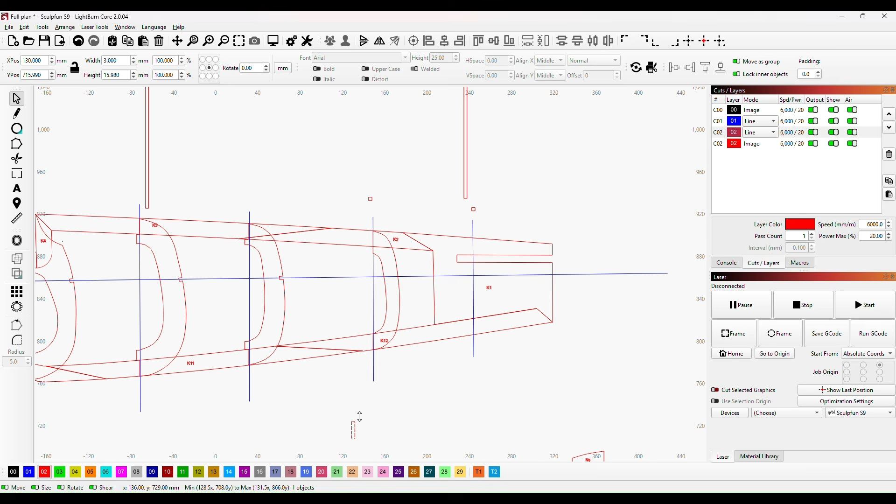So all I'll do is bring this down. This is 3 millimetres wide. So I'll just make a small piece and then I'll bring it up to here. And all I'm going to do with that is I'm going to use Control and Shift, and I'm going to bring that up until it just touches this line here, so that will be inside of the keel, and then I'm going to bring that up level, and then if I just copy that, Control C and then Control V, I can do the same at the bottom.

Now what we see here at the bottom, our former is quite thin at the bottom, so what I'm going to do is just bring this up, extend it up a bit. So I'll put that where we want it, which will be right in line with the bottom of our former.

Now you see these blue lines, remember we just put them in freehand and I haven't corrected those to be perfectly upright, so I'm not too concerned that it's a little bit out to the bottom. Now if we just go to our main former, go to nodes, and all I'm going to do with this is I'm going to move this node directly up to about there. We can just delete this node, I think. So select that node, press D.

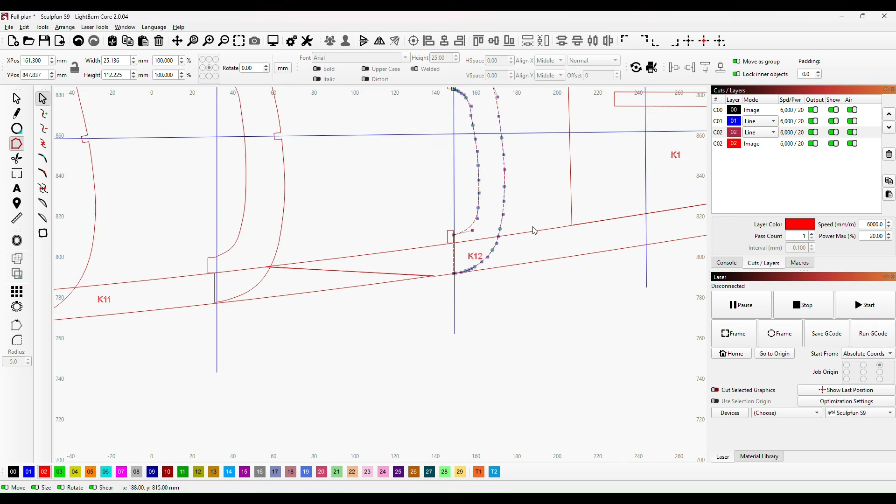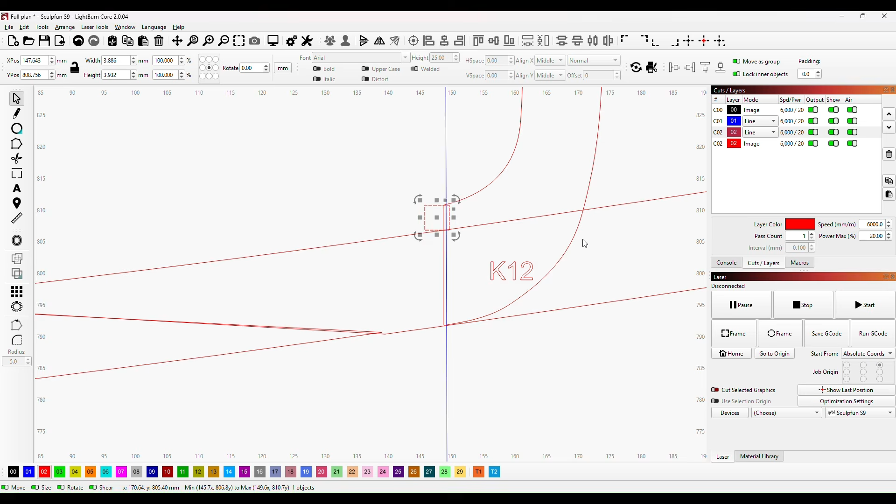There we go. Slightly deeper bottom part of our former. And so if I just bring this down so it's level, and then all I'm going to do is just stretch that in slightly, and then press Control, so that's selected. Select our main former, select the bit at the top, and what we can do with that is just bring it out of there,

and then if we just stretch this one so it comes inside, and then go to our snipping tool and we can remove those two bits. Do the same there, and we've now got that key, so that will now fit nicely in between our two parts of our keel. So we drop that down and we'll put it into place by using Control Shift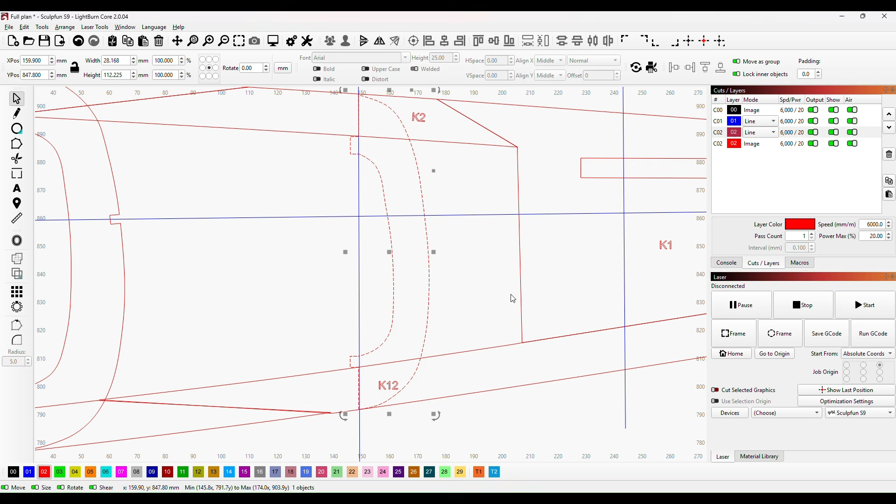and just put it there, and then we can take the square that we made earlier and we'll drop that down. Now these snap into place on the line, so you know that that's centered on the line, because when you get close it just snaps into place. There you go, so that is centered on the line. So all I need to do is bring that across,

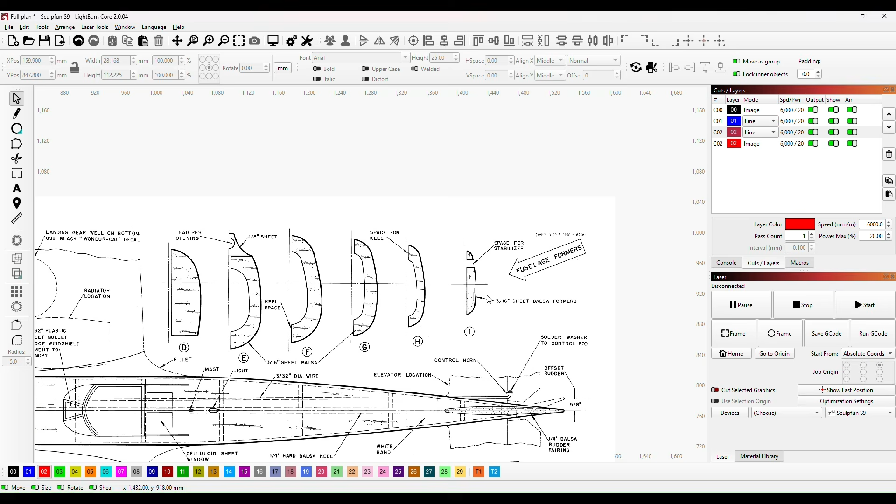and then if I just rotate it so that it becomes flat to that surface, then what I can do is just stretch that a tiny amount without moving any of this inside. Get our snipping tool and just snip away those pieces, and that's that completed. Okay, so the next one is just in two parts, exactly the same. So I'll just go ahead and make that, and then I'll show you the next step once that's done.

Okay, so we've now got all of our formers made up for the main body of the plane, but what is clear is that we're going to need more than just this one notch, because we're going to have stringers running along, because remember we're covering this with Oracover rather than using planking, which was what they were going to use. The original plan says planking 1/8 by 3/8 strips covering the whole aircraft.

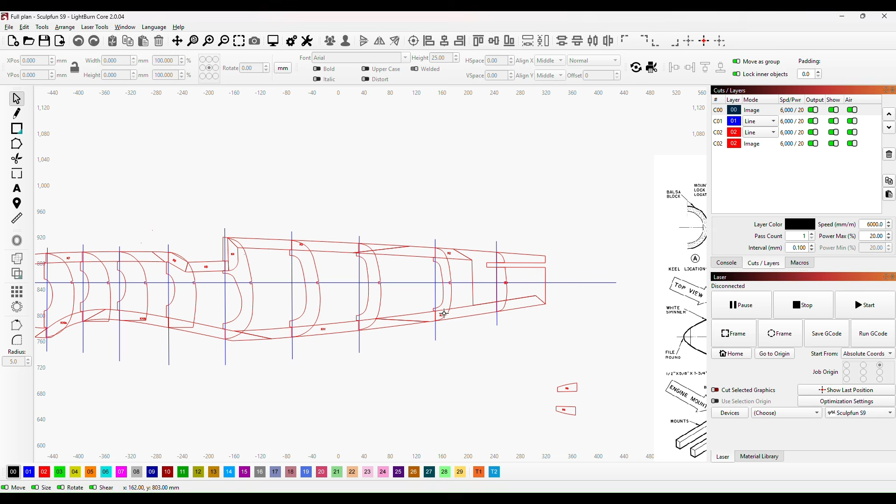So the way I want to do this, we're going to have to work out how to put these notches in and make sure that they all line up in a straight line. Now if you look at the curvature of the different formers and then you look at the shape at the bottom, clearly we can't use straight lines like we have done for the center one, because those lines will be, first of all, at different angles, but also the curvature will vary in different places along the length. And then here, of course, going over the wing, there won't be a curvature because it ends up flat, so there'll be no curved underside.

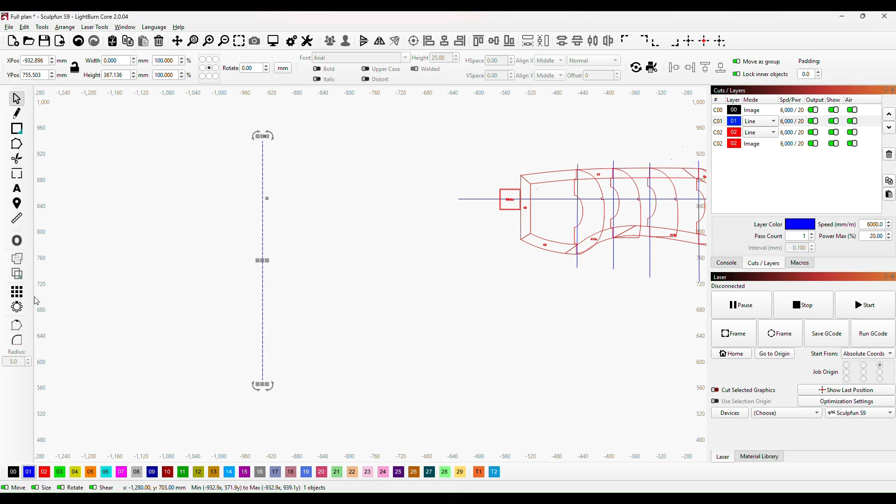So the way I'm thinking we should do this is, if I take a straight line just like that, and then if I go to nodes and make that line perfectly vertical just by hovering over it and pressing A in nodes, if I come off that now and if I go to this tool here, which will create a circular array of this line. Now I've set this to 24 copies just by altering that number there, and now if I press OK, I've got 24 copies of this line. So there's 1, 2, 3, 4, 5, 6, 7, 8, 9, 10, 11, 12, and then another 12 round there.

So what I'm going to do is I'm going to use this to make sure that all of our notches are in the correct place, and I'll show you how I do that in just 1 minute. If I just take this one side of this circular array, what I don't want is that many notches, that many stringers going the length of the aircraft. But at the top where the curve is and at the bottom where the sharpest curve is, I will want probably 2 right there. The center one, that's going to be our keel.

So if I take 2 and then take this next one and then just delete that, and then take this next one and delete that, and then come down, take this next one, delete, and then this one here.

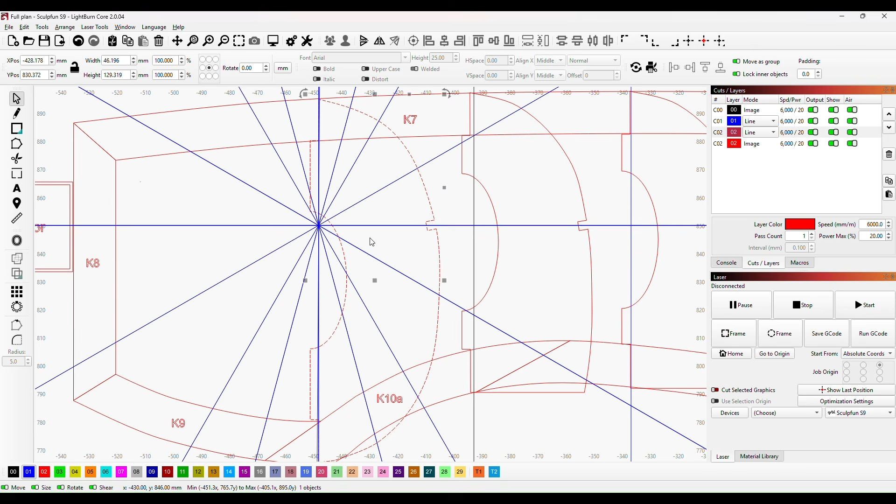And then what we'll find is, I want to align this line here with the edge of our new shape. So just bring that in, just like that. And then if I take both of these shapes away, so I've selected the former, and now if I press Control and select our new shape, I can come across here, bring both of those out, and this now tells me where I want to put my new notches for our stringers.

So if I create a shape, and we'll make that red, and then if I make that 3.2 by 3.2, what I've got now is one square here, it's 3.2 by 3.2. So if I bring that across, I'll just line that up there. If I Control C and then Control V, and just make a copy of that next to each of my lines,

what I can now do is I can put these straight onto the line. That'll snap to the center there as it has done. Then I can rotate and then bring this down that center line to there. And then if I just stretch that a tiny amount, I can then get my snipping tool, snip away these 2 bits,

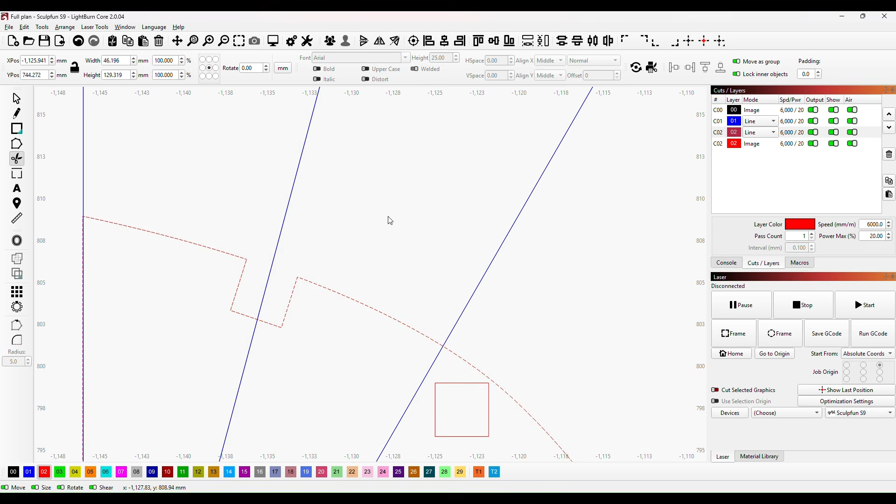and then do the same, whoops, and then do the same here, snap to the center, rotate it round, bring it down, and then just stretch that a tiny bit. And this does only want to be a tiny bit stretched because we've changed the angle now; if we stretch it more, it actually distorts the shape. So we want the smallest amount.

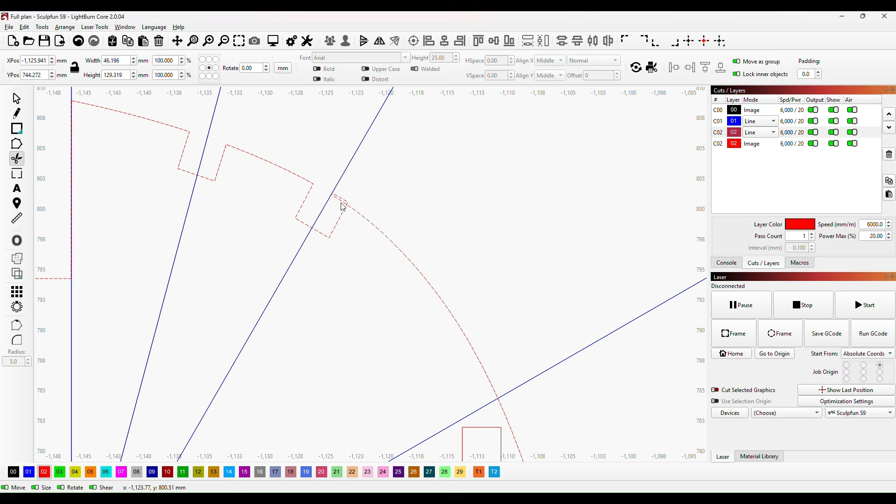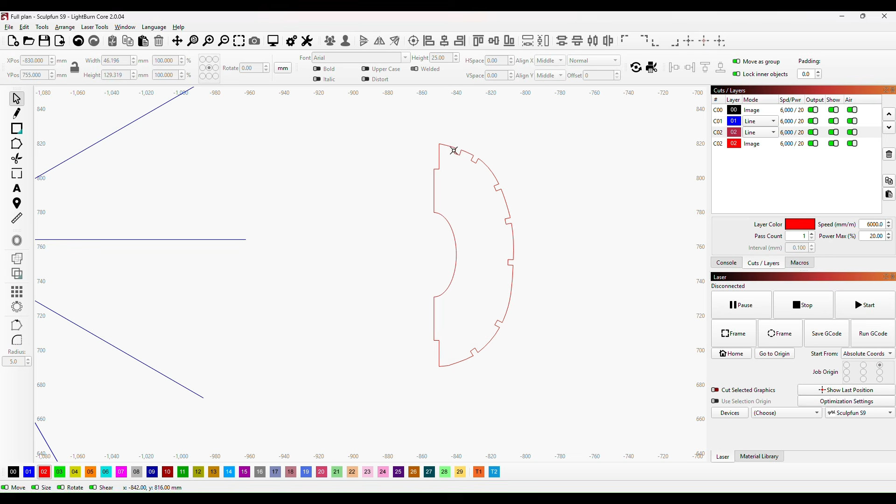Get our snipping tool, snip those parts out, and then we'll just carry on doing the same, and I'll show you what that looks like in just 1 second. Okay, so that is our component now completely made up, and you can see we've got more stringers on the tighter part of the curve at the top, and then again at the bottom.

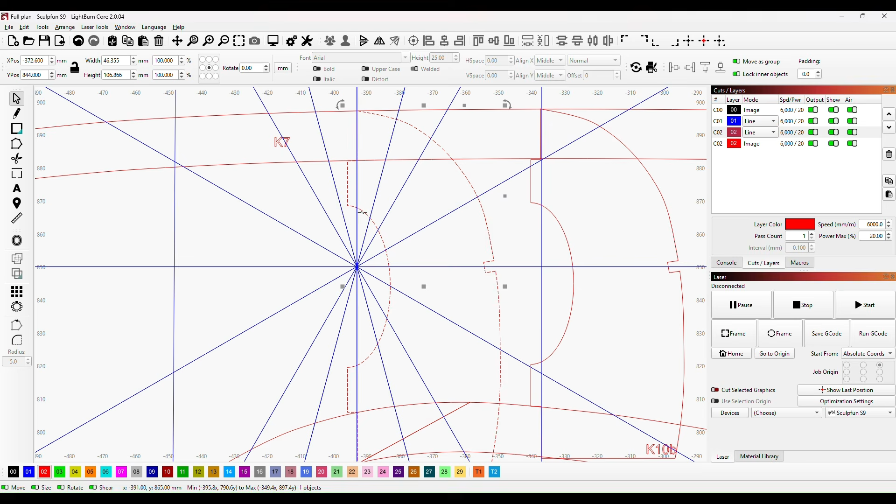And now if we use that same pattern in exactly the same way on each of these formers, you'll find that when we come to assemble this, all of the notches for the stringers will line up absolutely perfectly. Okay, so I'll go ahead and do that with all of them, exactly that same process, making that center, taking this so that the edge is right on that line, then Control, bring them both across together just like that.

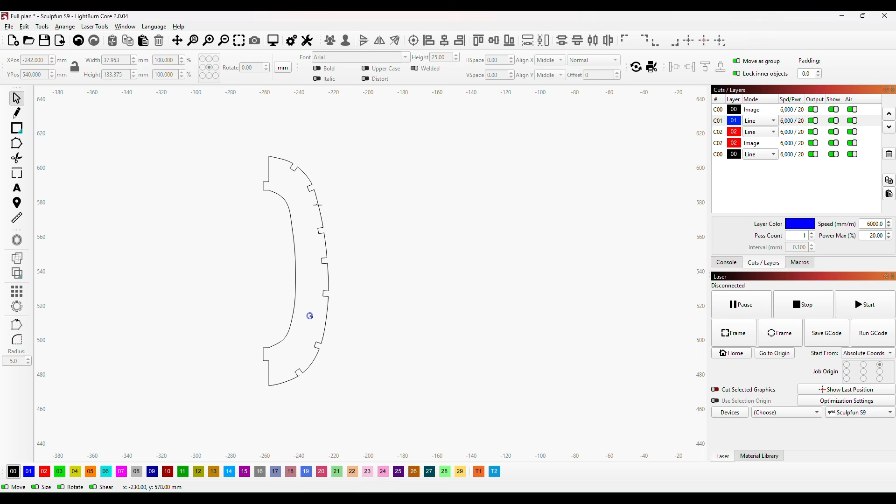Okay, so I will just very quickly cut these out, and I'll show you what they all look like when they're all completed. Okay, so that's all of the formers made now for the side of the aircraft. I can just show you what they look like if I bring one away from there. So that's one of the formers, and of course these will all be in pairs, so if I just copy that, there will be one that goes the other way, and they will sit like that with the keel sitting in between, and that's how the fuselage for the aircraft will be formed.

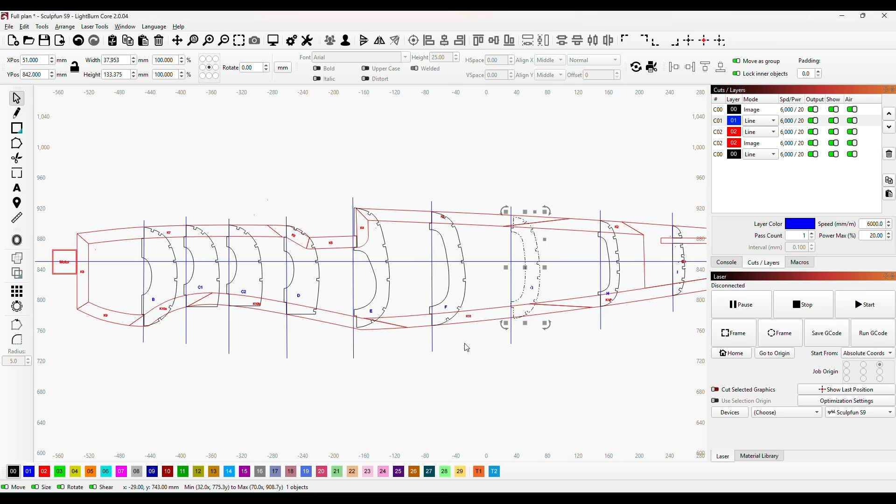So with that in mind, let me just get rid of that one, and I'll bring this one back and put it back in place. I'm going to stop this video there, and in the next video I'm going to produce the nose, and I'll be using a template that I made when I did the Contester, and I'll be using the center of this template here, which is the motor mounting, and this will be made out of plywood. We'll complete the nose and we'll work out what we have to do to make the transition down to the very end of the nose where just the motor protrudes.